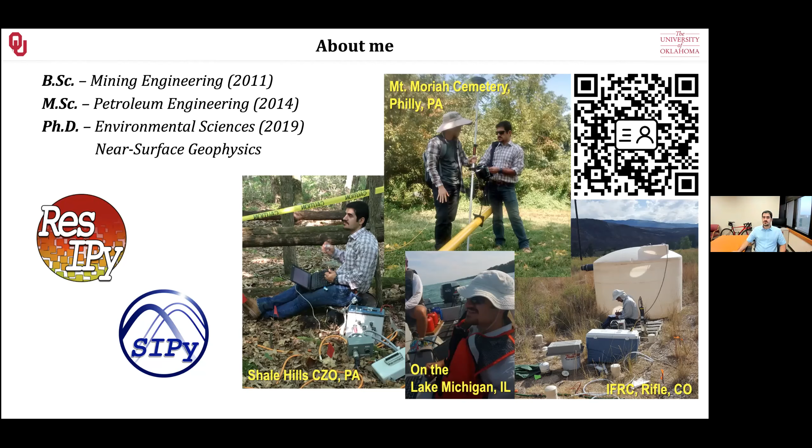In this talk, I'm going to talk in two parts. The first part would be basically my PhD project, which was soil stabilization involving an environmentally friendly method called microbial induced calcite precipitation. And then I will talk about how I approach monitoring it, unlike the regular and conventional methods that basically take a direct sample from the soil and analyze it. I use geophysics to indirectly monitor it and make sure I don't disturb anything in the subsurface.

In the second part, I will talk about how we try to use the same geophysical method to study soil failure. We know after soil has been stabilized, it can become destabilized by a lot of phenomena such as rain, buildings and infrastructure, and a lot of features. So we must know if our geophysical method is capable of doing both, monitoring soil stabilization as well as its destruction, because we want to prove that this geophysical method is a proper method for long-term monitoring of a site that has been stabilized before.

But first, let's talk about the importance of soil in our life. We all know that soil is the first point of contact to the ground, our earth that we live on, and it supports our ecosystem. All of our environmental interactions are through the soil. Our agriculture comes from the soil. Raw material mostly comes from the soil. And also our physical and cultural heritage, our history, is buried in the soil.

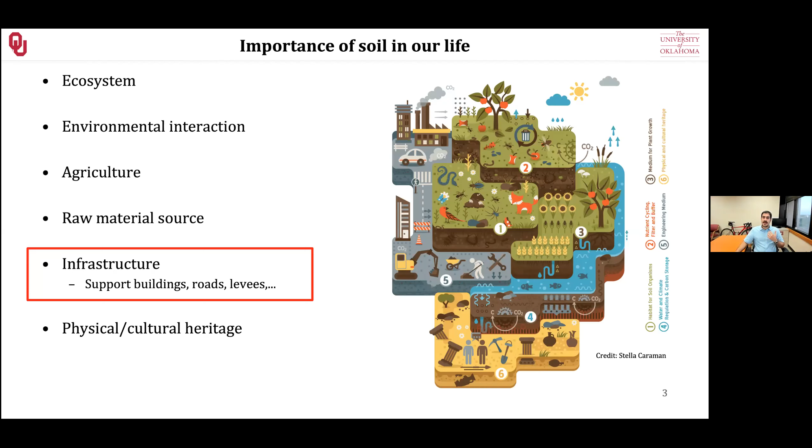But most important of all, I would say, is infrastructure. Soil is the first point of contact for us. So we have to know that the soil that we are trying to build our buildings, roads, and everything on is able to support this infrastructure. To do so, we have to do a lot of analysis to make sure that soil is capable of staying stable throughout the time. Because if it's not stable, we may have a house that collapses because of a landslide.

We may have a levee that is actually going to collapse, and a lot of bad events can occur if we don't study the soil well enough to know its mechanical properties. Rain, earthquake, weathering, and even anthropogenic activities all can make soil become unstable. And as you know, we cannot live on an unstable soil.

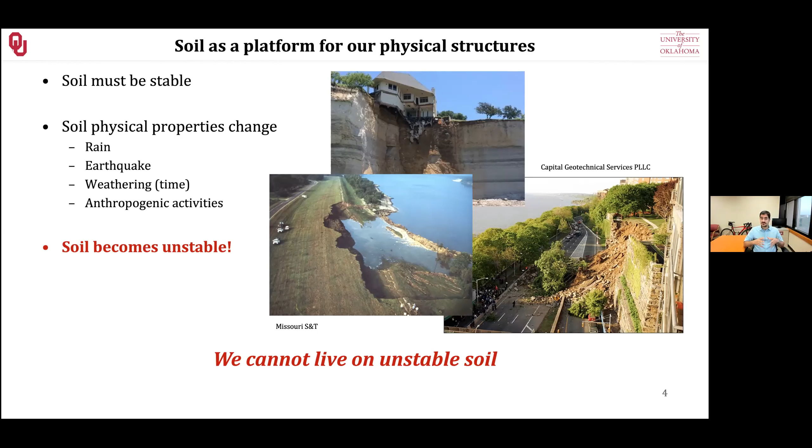So the objective here for me and for us geophysicists is to know if our methods are able to monitor the process that we use to stabilize the soil or not. And can we use the method to identify these mechanical properties of soil with geophysics, and hopefully in future, by the permanent site installation of such geophysical methods, we would be able to predict the mechanical problems that may occur in the future, basically say when or if the soil is going to fail because of any of these destabilizing events such as rain.

So let's talk about soil stabilization and geophysics. The process of soil stabilization or soil strengthening or ground improvement, as civil engineers would call it, is basically used for a lot of different factors, such as building foundations. You cannot build any buildings on a loose soil. You cannot build a house on sand. So you have to make it become stabilized.

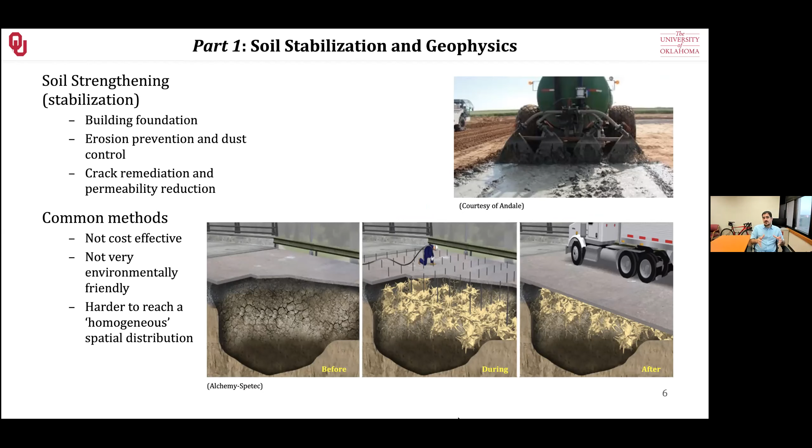Now, this is not the only thing that we use stabilization for. We have a lot of desert areas. We do stabilize the soil for preventing erosion as well as dust control. And sometimes there are rocks that are actually prone to become unstable, and we can use crack remediation and permeability reduction and so on with these soil stabilization methods as well.

Now, there are a lot of common methods currently in practice that civil engineers use, but most of them involve injecting an agent into the subsurface that binds these loose materials together and stabilizes the soil. As you can see in these pictures I'm showing here, the first method is the simplest method, pouring a cement slurry on the soil, and that basically binds everything together and that soil becomes stable.

Now, the problem with such a method is that, as you can see, it destroyed everything, all the vegetation, the environment, ecosystem, and everything. And as you probably guessed, it is not a cost-effective method because look at the instruments they're using, the material they're using, and so on. The other method that may not be as destructive on the surface would be injecting the cement through boreholes into the subsurface. Although this method might be more effective than just pouring the cement, again, this is not a cost-effective method because we have to drill a lot of small boreholes.

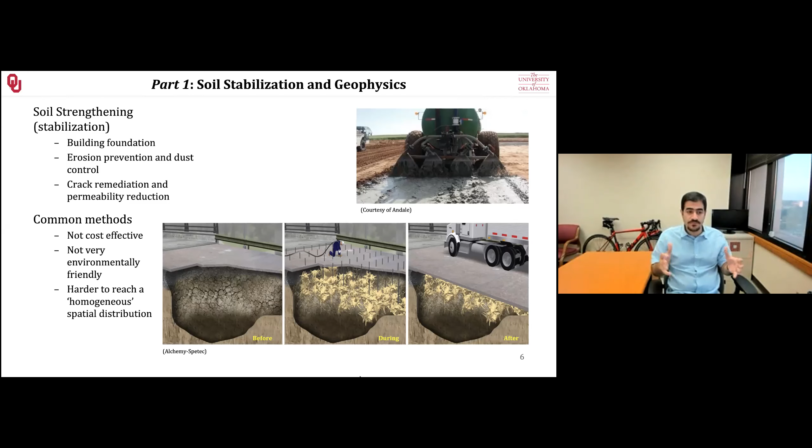Now, these problems can be overcome with a new method. This method is called microbially induced carbonate or calcite precipitation. What we're doing here is using the microbes that are already in the soil. They're available everywhere. They are not harmful to us humans, and all they need is a little bit of food, a little bit of ingredients, and they will produce this binding agent for us in the subsurface. Here, this binding agent, this cementation agent, is calcite, a mineral that we find naturally occurring as a cementation agent in a lot of sedimentary rocks.

So this method, compared to the conventional methods, is environmentally friendly. As a naturally occurring material, calcite is not harmful to the environment. It is relatively low cost. We're not injecting through too many boreholes or too much material. It is much easier to achieve a homogeneous spatial distribution because you're using the microbes as agents in the subsurface, and they're tiny. They can go to all of these small pore spaces and produce calcite there, and we don't have to do anything except feed them.

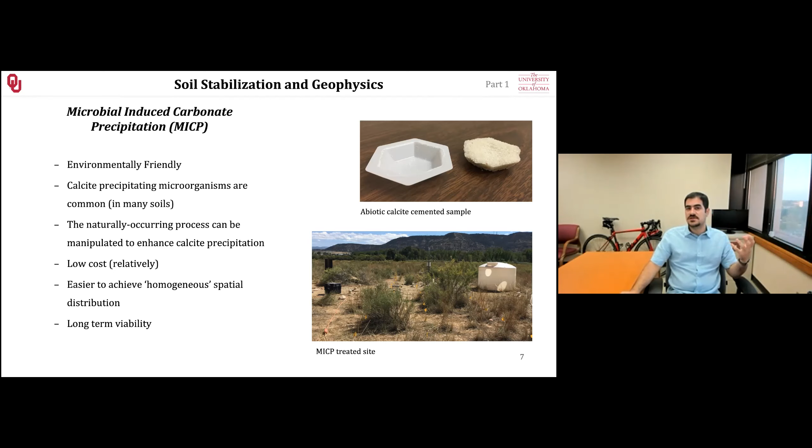So the only thing that remains is: do we know it is good for the long term or not? That's why we are using geophysics to make sure this method is viable for long-term use, like previous methods of injecting cement into the subsurface. A little bit about the monitoring techniques that we can use for monitoring this project. As you geophysicists already know, there are two ways.

Direct measurements. Basically, a lot of engineers use this method. They drill boreholes or take an actual sample from the stabilized soil in the subsurface or on the surface. These methods are accurate. You're basically taking out a sample that has been stabilized, taking it to the lab, doing a lot of analysis such as mechanical properties, triaxial test, confined stress test, and so on, and making sure that soil is working.

Now, the problem with these methods is that they are discrete. The sample that you're taking belongs to the point where you took it. It's not representing the rest of the area that was stabilized. And if you want to make sure that the whole area is stabilized, you have to take a lot of samples. And basically that defeats the purpose of stabilizing, right? You're destroying the site that you just stabilized.

And it is expensive if you want to take a lot of samples, and it's time delayed. Most of the time the sample has to go into a lab, get analyzed, and then the data comes back. So time has passed, and we don't have such luxury when we are working on a project that has a deadline.

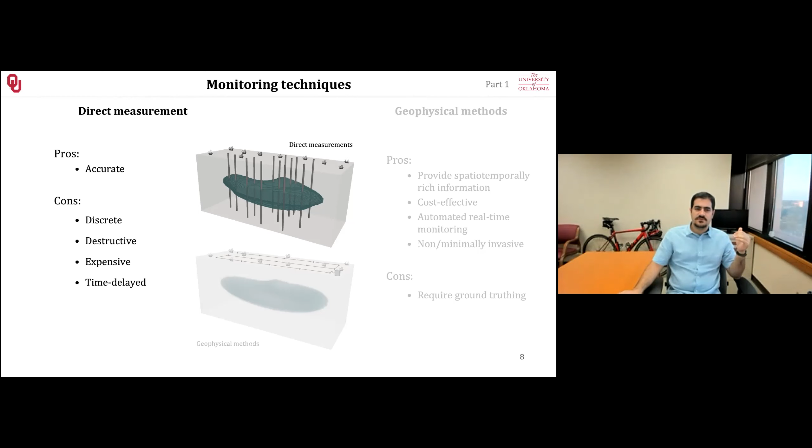On the other hand are the geophysical methods. With these methods, most of the time, we do not need to dig any boreholes. Basically, they provide spatiotemporally rich information about the subsurface with a few sensors laid on the surface of the ground, and they can be super cost effective compared to direct sampling because we're not destroying anything, and we can cover a large area in a short amount of time.

In addition, they are very beneficial for automation. We can use geophysics permanently at a site and continue collecting data forever. If we have the right tools, software that I'm going to talk about at the end of this talk, we can analyze data on the go and get information about what's happening in the subsurface during soil stabilization without any problem.

Now, there are some cons to these as well. They usually require ground truthing, so we cannot just take our instrument into the field without any prior knowledge of the site and pinpoint what exactly is going on in the subsurface chemically or physically. We can say something is going on, but we can't say exactly what that is. So we need a little bit of information, maybe a few boreholes here and there, and then we can compare that with the data that we found in the geophysical analysis.

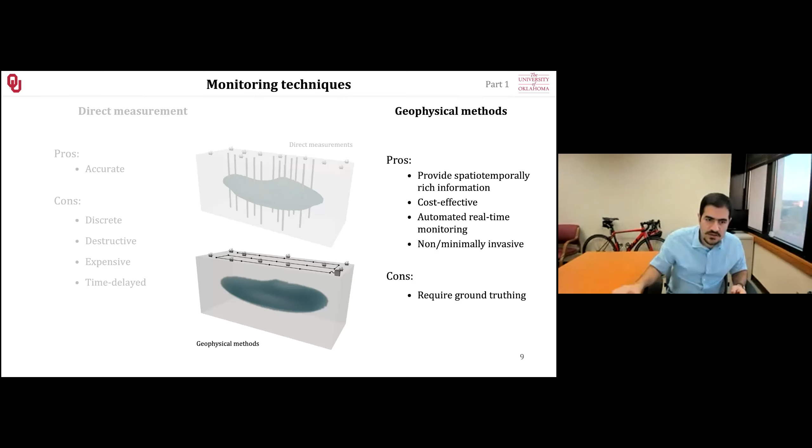Here, I used mostly geoelectrical measurements for both of these projects of soil stabilization and mechanical properties monitoring. In general, we inject a current into the subsurface through an array of electrodes, and we measure the potential differences, the time delay of these potential measurements, as well as the redistribution of ions because of the current that was injected into the subsurface.

Another thing that occurs is that because ground, or subsurface, is not a conductive material such as a copper wire, it causes the ions to be redistributed and the ground acts as a capacitor. So current passes through the subsurface, and also a capacitor acts in there. So we can measure both resistivity, or basically the ability that causes the voltage to drop, and polarization of those redistributed ions because of the diffusions that occur in the subsurface.

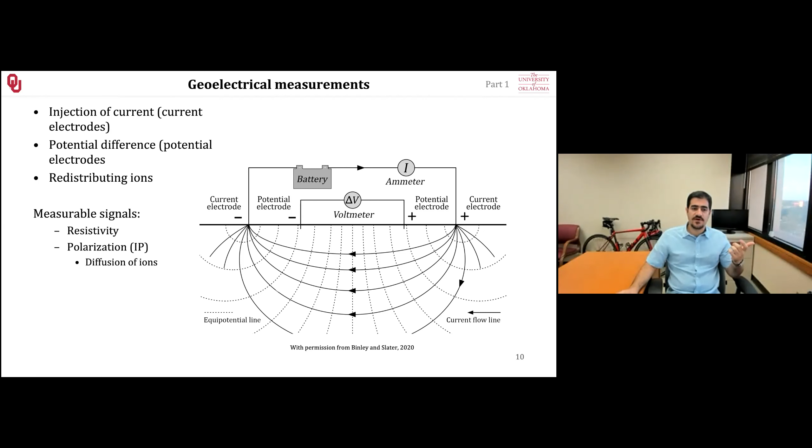Now, if we focus more on the surface of the minerals or the soil grains, we are able to see that the soil grains are not conductive, such as a wire. So basically they get polarized. They get polarized because they're negatively charged. We are passing through a current, so positive ions get attracted to the mineral, and then the free fluid acts as a connector of the current. And these two layers that we call the electrical double layer, fixed Stern layer and diffuse layer, act as that leaky capacitor, or that capacitance, basically polarization.

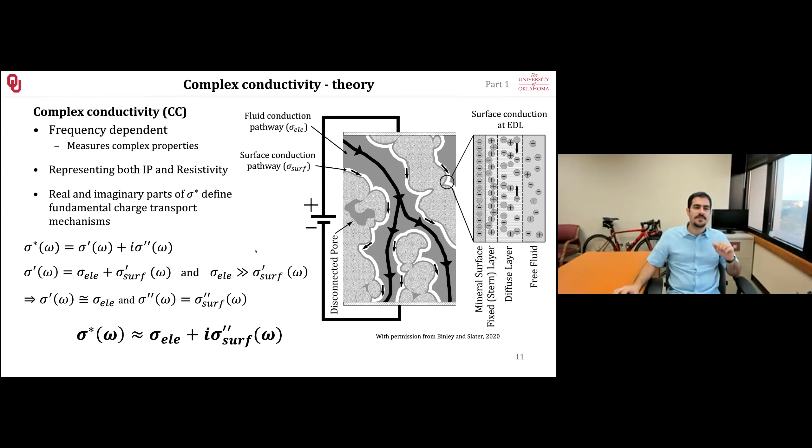Based on that, we are able to measure a lot of different features because electrical conduction through the pore-filling fluid depends on the saturation. If we have a partially saturated soil sample, we have a different conduction. If we have a dry sample, a different conduction. And if it's fully saturated, a different conduction. It depends on the porosity. The more porous it is, the more interconnected the space that we have, the better conduction, as well as depending on the fluid conductivity, if you have a very saline solution or not, and so on. So the ionic concentration is important as well.

Now, the surface conductivity, basically the polarization that was happening in here, the redistribution of ions in the double layer, depends on the surface area and not only saturation. Basically, the more grains you have and the finer they are, you have more polarization. You have more surface area to get polarized, more surface ions. And then in that surface area, if the ions are bound and they're not that mobile, you can actually measure that as well. So the ionic mobility also affects the surface conduction and the polarization as well.

There are other factors such as pore size distribution, very important. If you have a larger pore, the ions distribute slower because they need to travel a longer distance, and if they are smaller, a shorter distance. So basically the polarization occurs in a shorter time. And the interfacial charge density, basically the amount of these positive ions that are going into the electrical double layer.

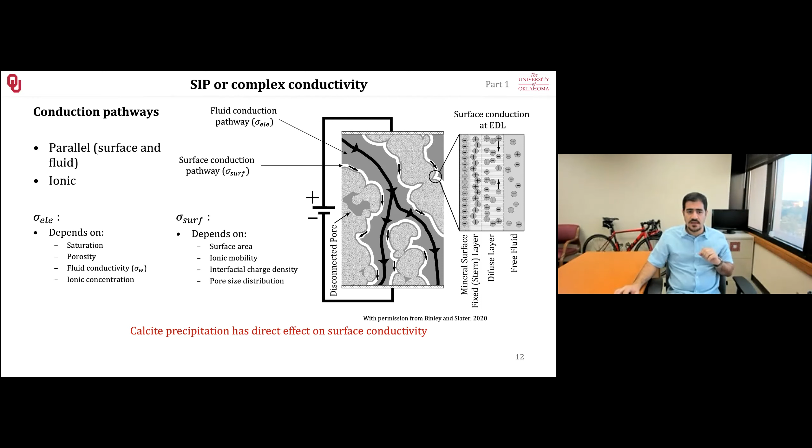And because ions take time to get redistributed, we will see something called a phase lag. This time difference gives us the phase lag. Basically, when measuring the potential, we will see everything with a time difference. We know the current that we injected, how much amperage we injected, and how much voltage that was.

So basically, we also get the impedance, or the complex conductivity measure of the resistance. Combining these two will give us complex conductivity. Now, for doing that, we need a factor called geometric factor to know exactly how we distributed our electrodes on the surface or in subsurface or on sample, or basically know the geometry of our measurement sample.

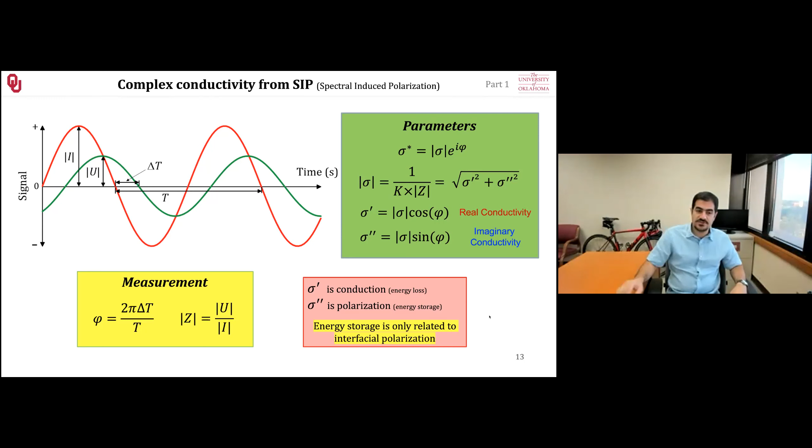And based on that, we can get the real conductivity, which is the conduction, for instance, through the pore filling fluid, and the polarization, which is the energy storage because the ions were redistributed and got polarized. We get these two in both lab settings and field setting.

For the lab measurements, we usually do everything on a column of soil. So we have an instrument capable of injecting current at multiple frequencies. We usually have a current electrode at bottom and a current electrode at top of this column that is packed with soil sample, and two potential electrodes in the middle. The geometric factor for such a column is very easy to calculate, is basically the area over length. And based on that, we can calculate the complex conductivity measures.

So what it will give you, you start measuring from lower to higher frequencies, and each of them will give you a point of phase and impedance. And when you plot everything over a frequency range of your measurements, you will get such a diagram. So ideally, you will have a peak in your phase shift or phase lag spectra, and sort of an inverse S shape in your impedance.

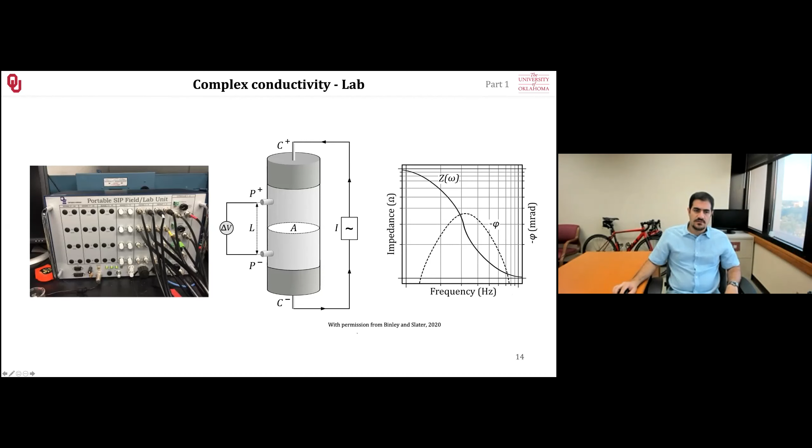So as I said, you will be measuring a phase lag, which is basically inverse tangent of the imaginary part, or the energy storage, over the real conductivity or energy loss, which because at the lower frequencies, these are very different than each other, we can just ignore the tangent, or simply put, the phase would become the imaginary conductivity over the real conductivity. And it is measured in radians, but in reality, for environmental applications, that's much smaller than radians, and we get milliradian range.

Then we have the impedance, which is the potential difference measured at these two potential electrodes, for instance, and the magnitude of the injected current will give you the impedance. Combining them with the geometric factor, which can be very complicated if you have an array of electrodes on the surface, but it's super easy for a column, which is area over length, will give you the complex conductivity magnitude.

Now, to convert this to real and imaginary part, we will use these two equations because it's a complex number. It has an imaginary part and a real part. The real part would be this equation: the square root of the squared real conductivity plus the squared imaginary conductivity, multiplied by cosine of the phase lag. And the imaginary part is the same thing, the magnitude by the sine of the phase lag. So this is the imaginary part and this is the real part.

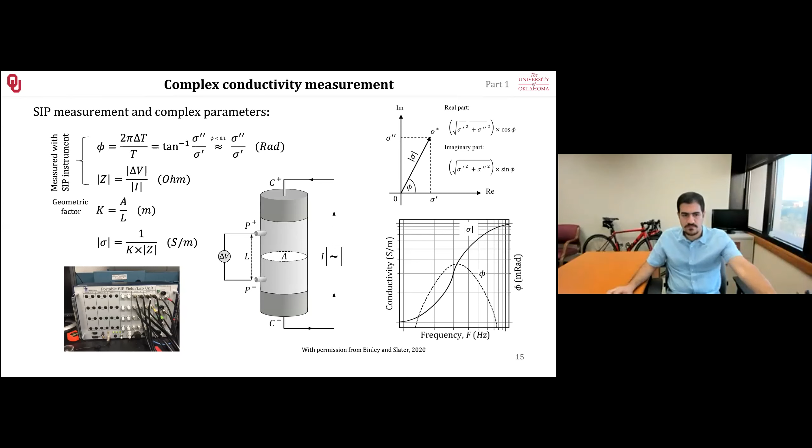And then we can use these different measures for different applications. So as you remember, the imaginary part represented the energy storage or the polarization. It depends on the surface area, on the pore size distribution, and so on. And the real conductivity depended on the saturation, porosity, and the salinity. So we get different properties from the subsurface or our sample with this complex conductivity method.

A lot of instruments are available to do so. Most of them are working based on resistivity and time domain induced polarization. And they are usually incapable of doing multi-frequency injections in the field. Those that are available to do multi-frequency injections in the field are very expensive, but scientists have shown that time domain measurements can actually be converted to frequency-dependent measurements as well, only if we get the full waveform of our injection. So we know the whole story, let's say, which I'm going to tell you about.

Now, in time domain measurements, unlike the frequency-dependent measurements where we were injecting an alternating current, we are injecting a direct current into subsurface. What we do, we basically turn on the current in a positive polarity, turn it off, and then turn it on in a negative polarity.

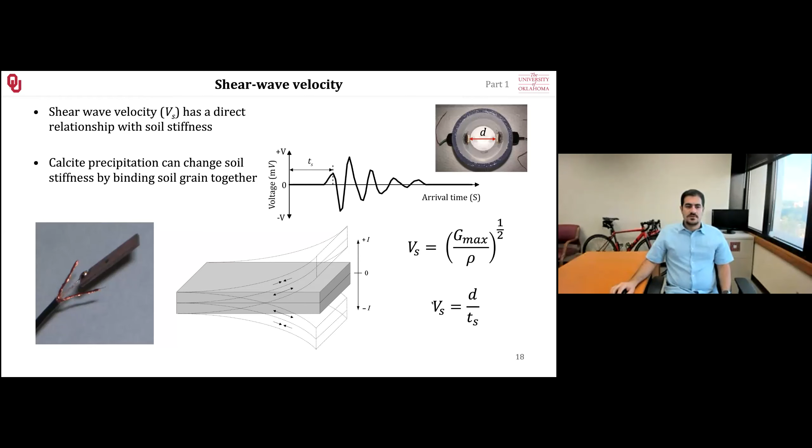Now, this would be a sort of ground truthing engineering method for my geoelectrical measurements in the field, in addition to direct sampling. But before using the microbial approach, I have to see if my geoelectrical measurements are actually sensitive to the cementation agent, the calcite, right? Do I even get any signal if I have calcite? If I don't see any geoelectrical signal when I have calcite in the soil, then what's the point?

To do so, I did a controlled environment laboratory experiment in which I only used calcite, no microbes, no nothing. So I basically injected calcite powder inside my sample and measured its geoelectrical and shear wave velocity response to see if calcite actually has any effect on our geoelectrical and geophysical signal or not.

To do so, we injected two different solutions, one calcium-rich, one carbonate-rich, and eventually calcite was precipitated inside our column. In the middle, we had electrical electrodes on the sample holder as well as bender elements, and we were able to see that calcite was actually precipitated inside the column after about 250 hours of experiment, something like that.

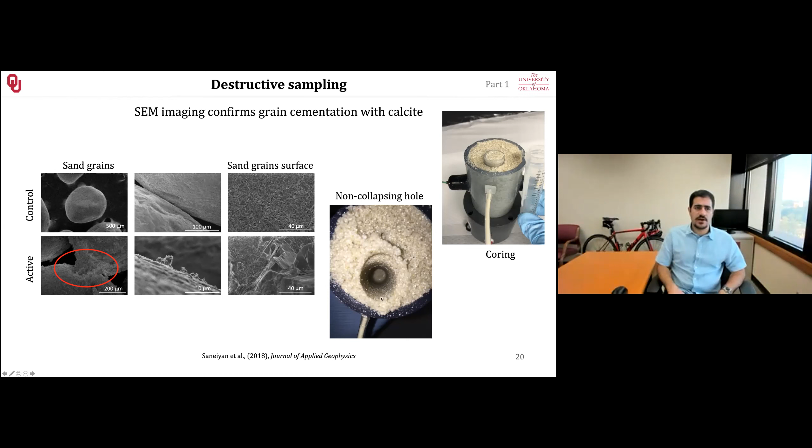And also, when we were destroying the sample, basically everything remained intact. So the mini borehole, I would say, that we dug did not collapse on its own because the soil was stabilized in there. Our ground truthing, engineering-accepted geophysical method showed that the soil stiffness had increased. We saw a 33% increase in the shear wave velocity, meaning that we have actually filled the pores with solid particles, making the shear wave propagate faster. That showed us the calcite actually cemented the grains.

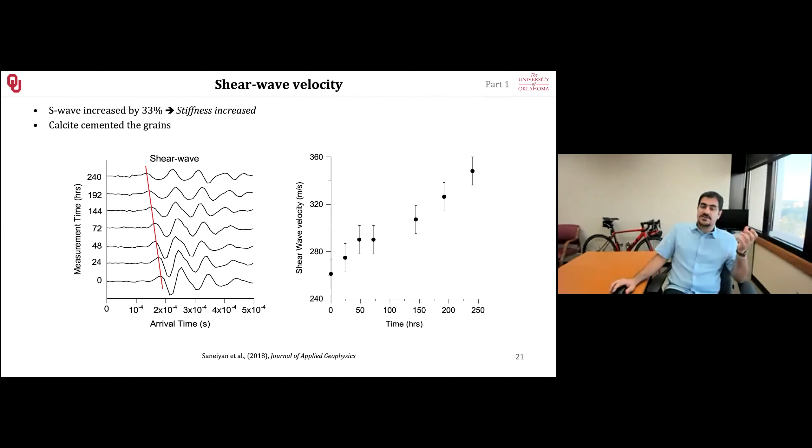But what we were interested in was the complex conductivity method, or the geoelectrical response. In that, we were able to see a peak forming in our imaginary conductivity spectra. You remember the phases I showed you, that we were looking for a peak, right? We didn't have any peaks initially, but as the precipitation continued, we were able to see a peak forming at around 1 hertz that keeps going up in magnitude until the middle of the experiment, and then basically starts to go down and reaches a constant level.

Now, if you remember, I said that the imaginary part, the polarization part, the energy storage part, depends on the surface area and the size of the pores and such factors. That basically tells you the more solid particles in a finer form you have, the higher polarization you get. Now, I interpret that initially the signal is going up because the calcite is precipitating in a powder form. And as we keep precipitating, these powders are coagulating, and that initial increased surface area from the powder form is actually decreasing. They are connecting together and becoming larger calcite crystals, calcite coagulations.

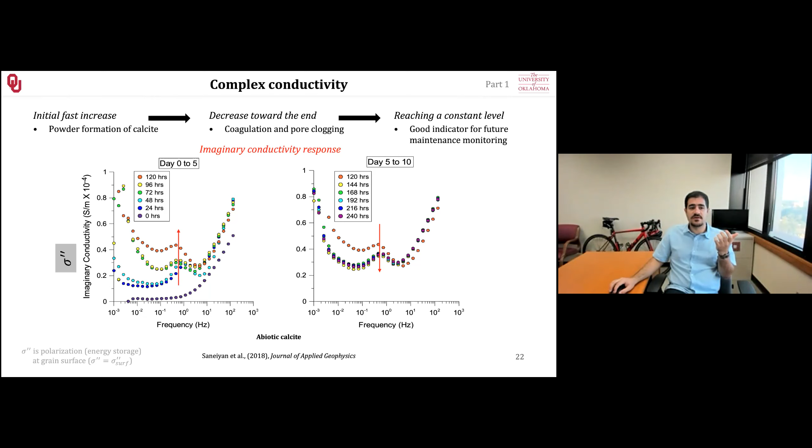So basically the surface area is now reducing from that peak after a few days and reaches a kind of constant level, showing us that the calcite is no longer increasing in surface area inside the pore spaces. What's happening is probably either an equilibrium, where the same amount is getting precipitated as is getting flushed out or dissolved in the water, or the area in the middle that we were measuring is now fully saturated with precipitated calcite, and we are not sensitive to any area outside of these potential electrodes. So if the calcite is precipitating there, we don't know it, honestly.

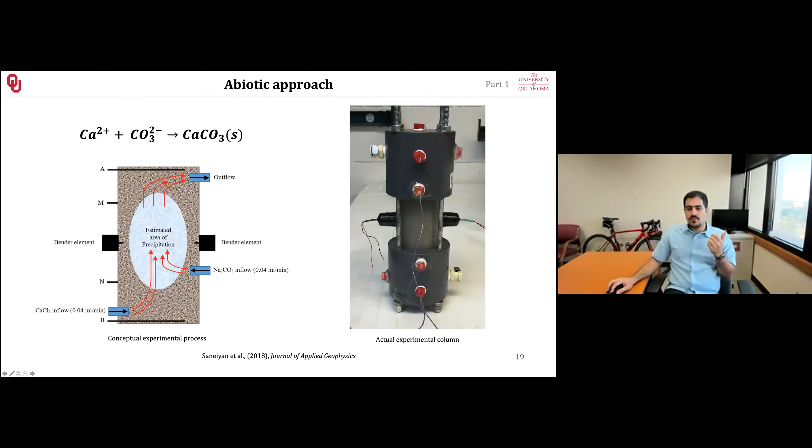So to put it in context, we had two different methods showing that our man-made calcite precipitation soil stabilization method is effective, and also that we can measure its geophysical signature.

Either being the shear wave velocity, which showed an increasing trend over time, not going down, and the complex conductivity that showed the pattern of the precipitation as well. Not just showing that, okay, we have a stabilized soil, but it also showed us when it's the time to stop injecting calcite. We don't need any more material.

This is very beneficial for field applications that makes us say, okay, enough. We don't need more. We don't need to pay more money to inject more material, because now we reach the constant level of a stabilized soil. We're no longer stabilizing our environment. We're just basically flushing the stuff out.

Initially, as I said, we assumed that we have a powder precipitation increase in the complex conductivity magnitude signal, and then these coagulated and created layers of calcite on top of each other, so that initial surface area that was because of the powder is reduced now. And then we reach a constant level because of this equilibrium going on.

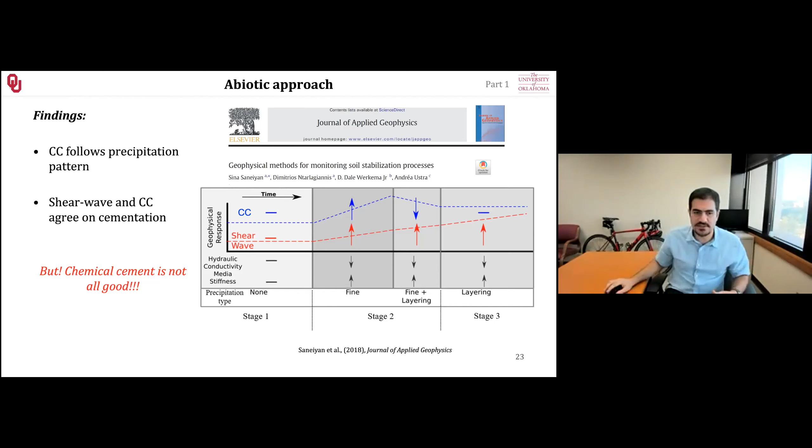But one might say, okay, this is perfect. Why don't we just use this abiotic injection of two chemicals in the subsurface and say, oh, we're good. Calcite is environmentally friendly, unlike Portland cement, for instance, and it works fine. Your geophysical signals work fine, but why do you need this?

So to those people, I would say, all right, remember, if there isn't any agent in the subsurface to take this cementation agent with it and precipitate it in the smallest pores, then we're gonna get a poor distribution of cementation. Basically, whatever is happening is at the zone where we are mixing these two chemicals, the zone we inject, not everywhere else. So how do we overcome that? To overcome this problem, we're gonna use microbes.

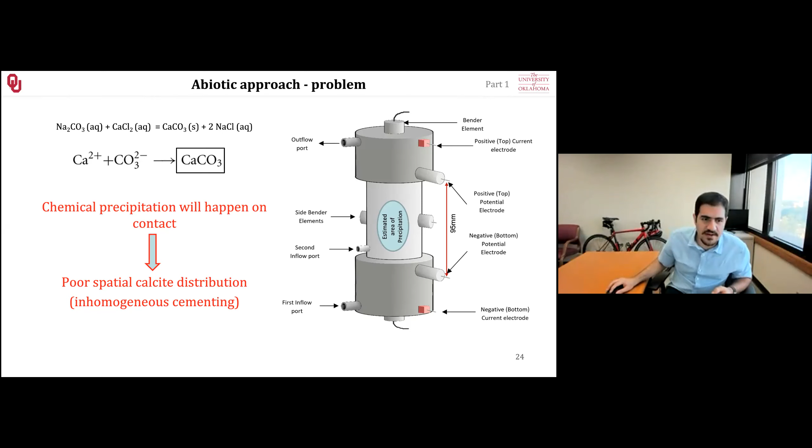Specifically, for the lab experiment, we are using a type of microbe called Sporosarcina pasteurii. These microbes are known to produce large calcite crystals, and they're very active in decomposing the material to produce calcite compared to the other communities in the subsurface. But we are just using these because this is a lab measurement. In the field, we don't really need this type of microbe. All other types of microbes capable of precipitating calcite are going to work, which I'm going to talk about.

In the lab environment, what I did was basically grow these microbes on a petri dish. I forgot the name for it. I'm not a microbiologist, but this growth media on the petri dish, for instance, here that you can see, prevents the microbes from moving. So when you try to grow them, they do not go outside of the area where you put the microbes. So basically, we prevent them from moving so they don't become contaminated by other microbes. Or if there is any contamination, we can actually see that.

So the very first step for a microbial project is to grow the microbes in isolated colonies to make sure you haven't done anything wrong. And then when we are sure that our communities are perfect and without any contamination, it's time to move them from the solid state into liquids, because we want them to actually move in the subsurface or in our sample. We don't want them to be at a fixed position, right?

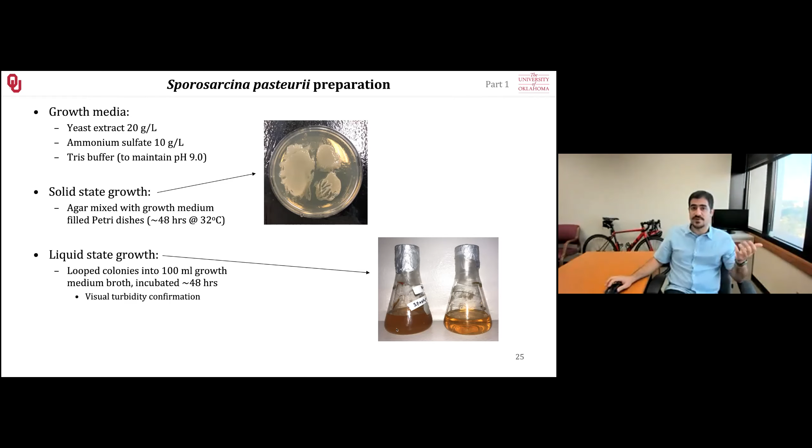So what are the right ingredients? These microbes need urea because they are capable of decomposing urea as a source of food for themselves. And when they do that, they produce carbonate. Now, if we have a rich environment that has calcium in it, it basically immediately starts precipitating calcite. So we're good here.

But there is a benefit to these microbes as well. They tend to attach to these calcium ions. The calciums actually get attached to the body of these microbes. So as they move around inside the column to find food, to basically go around and eat because they're hungry, they take these calcium ions with them, and wherever they go, they decompose urea, they produce carbonate, and at the same time, calcite gets precipitated.

So we have a better distribution of the cementation inside our sample or under the ground using these moving microbes. We call them motile microbes. So compared to the previous method, we're using the same injection ports like the previous time, but we are getting a better distribution of cementation inside our column. Or at least that's what we're hoping for theoretically. Let's see if we have reached that point or not.

In this part of the experiment, again, we use shear wave velocity as a ground truthing method. And we were able to show that the shear wave velocity increased about 34%, slightly more, but in the same ballpark as the previous experiment. Again, we are just using calcite inside our column, and the bender elements are at the same location and so on. But clearly it shows us the calcite cemented the grains together. So microbial induced calcite precipitation works as a soil stabilization method.

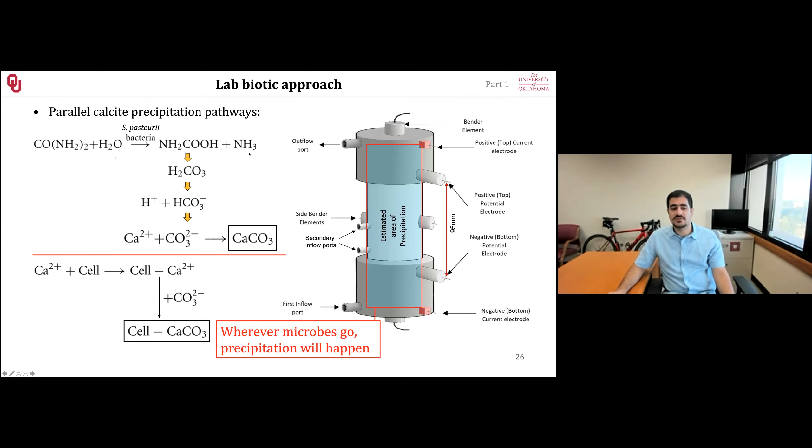And also analyzing the effluent solutions at each step of the way, we were able to see that the concentration of ammonia is increasing. If I go back here, you see ammonia is a byproduct of decomposing urea. So when it is there, it means that the microbes did their job. They basically consumed the urea, produced carbonate, and released ammonia. So that's one of the good indicators that the microbes did their job.

And ammonia is very stinky, it smells very bad, and we didn't need to analyze it, honestly. We just had to smell the column. It smells very bad. Anyway, so an increase in the amount of ammonia was observed. Calculating the chemistry, we were able to know the amount of calcite that was precipitated inside the treatment area as well.

But we are looking for our complex conductivity, or geoelectrical signal, right? We were able to see a similar trend here, just like the previous experiment, that we had sort of a no-peak sort of thing in the imaginary conductivity signal. And as we started treatment, the peak increased in magnitude and reached a maximum level, and then went down and reached a plateau.

Very interesting, very similar to the previous experiment, but this time we reached a much higher magnitude compared to the previous step. So we had much more surface area produced by these microbes. Basically, they distributed everything much better than the previous experiment. And then we had the same trend compared to the previous one.

So basically increasing, reaching a peak, decreasing, meaning that the calcite crystals first formed as a powder and were scattered all over. And then as we kept injecting food and calcium for these microbes, they produced larger calcite crystals that coagulated together and layered together. And basically that initial big surface area, because of the powder form, was reduced into chunks of calcite. So the signal magnitude was decreased.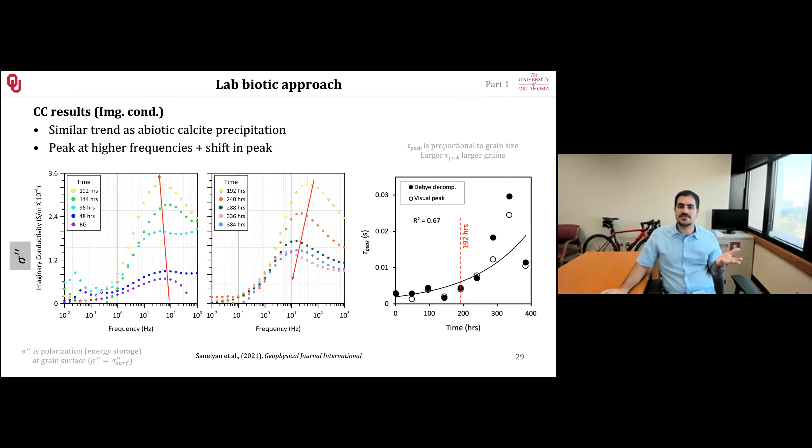Taking out the real conductivity just to show you that the imaginary part is sensitive to the pore size distribution, surface area, grain size, and so on. The real conductivity is only a measure of solution conductivity and porosity and so on. We can clearly see that there are no such peaks to tell us about the grain sizes or pore sizes in the electrical conduction that is happening through the pore filling fluids at all.

So we certainly need to use the complex conductivity methods or the induced polarization technique if we are trying to monitor soil stabilization in the field in the future.

So to summarize what happened here, basically we had a soil devoid of any calcite, and the moment the microbes were introduced with urea and calcium-rich solution, they produced a fine precipitation around the pores and inside the pores, and it reached a moment that we had a lot of fine precipitates inside the pores, and as time went by, they coagulated together and clogged the pores. So we don't have that initial increased surface area anymore.

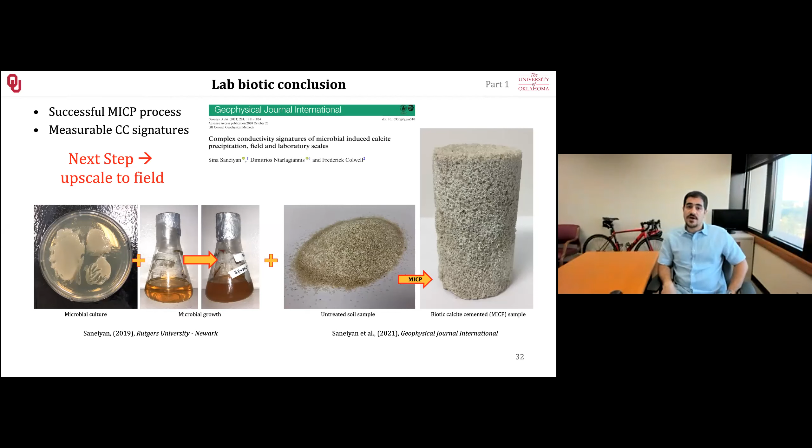To do that, we went to a field site in the city of Rifle in Colorado, United States. It was a Department of Energy site that previously had shown that microbes capable of decomposing urea exist in the groundwater. So all we had to do is feed them with calcium and start producing calcite in the subsurface. And that made it the perfect site for us.

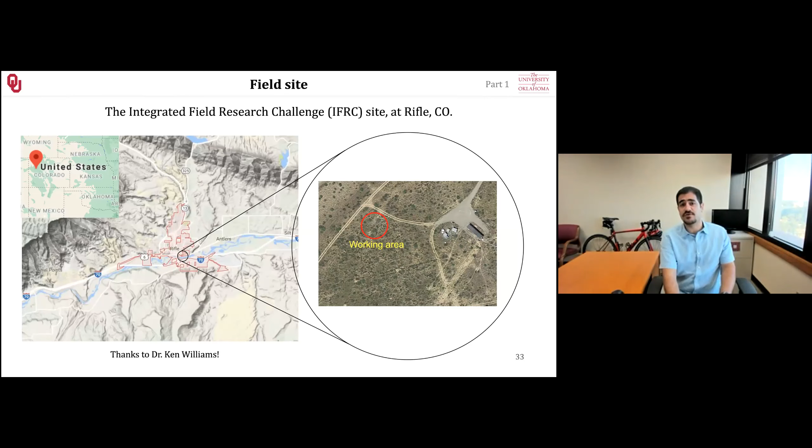Additionally, that site had numerous well bores already in place for ground truthing. So all we needed was to take samples from these boreholes, either solution samples or actual samples. So this is a perfect site for us, and it was large enough. It was about 20 meters this side and about 10 meters this side. So I would say large enough compared to a column experiment in the lab.

We know the groundwater direction here. The groundwater direction is basically from this side to this side. So we started injecting through wells available around here, and groundwater took all the ingredients with itself, and then we withdrew from the down gradient wells here to make sure that we are not contaminating the subsurface with too much ammonia. So we injected here, we collected here, and we assumed everything is happening in the middle here, just like what we had in our columns.

For that purpose, we laid out our electrical resistivity and induced polarization array on the surface on 3 lines here, and we were able to collect data on a daily basis.

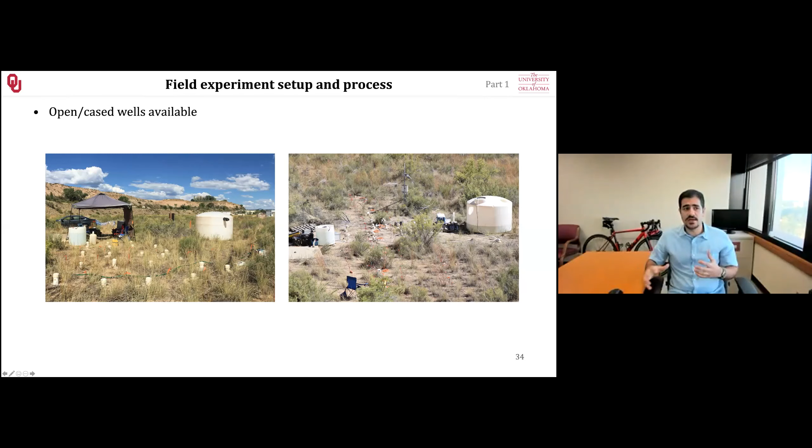What we did first, we had to make the microbes proliferate. We wanted as many microbes as possible in that region for us to produce calcite. So we gave them a source of carbon food that was not urea, just to grow. This was basically sugar, molasses. We waited 24 hours for them to proliferate and then started injecting urea on a daily basis.

Initially, we injected with a small concentration. That was not as effective. And then after 8 days, we decided to increase the concentration of urea. So we increased the calcite precipitation much more because we didn't have enough time to stay in that field. We only had 20 days.

At the same time, we were measuring resistivity, time domain IP, and spectral IP, which will give us complex conductivity. So we had every geoelectrical method over there. Additionally, we had the shear wave velocity measurements in the boreholes that were provided to us, so we had the ground truthing ability with the shear wave velocity. And we also collected the effluent to analyze a lot of different things such as ammonia, pH, conductivity, and so on.

So if I want to schematically show what we did, this was the smaller tank here at top and the larger tank at the bottom, and the groundwater is going to the south direction. We injected everything through 3 boreholes from here, and we withdrew everything from 2 down gradient wells and assumed everything is occurring in between these green and red boreholes.

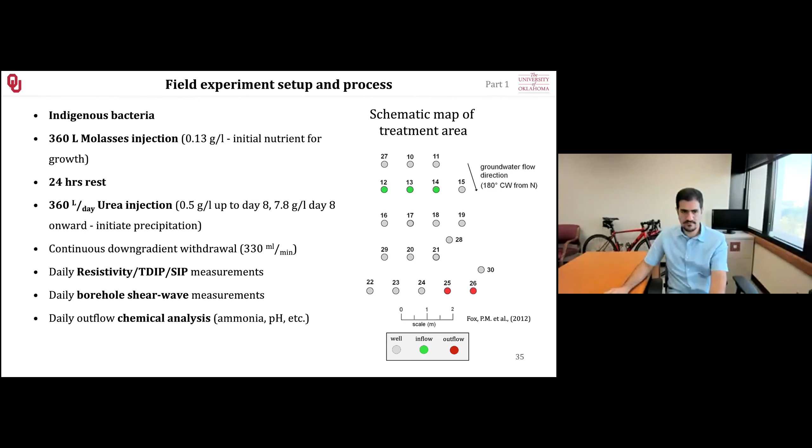We used a SIP 256C instrument from Radic Research Germany for measuring complex conductivity. We used an IRIS Syscal Pro capable of doing resistivity and time domain measurements at around 4 Hertz for our time domain and resistivity measurements. And we did everything on 3 lines for the time domain measurements and 2 lines for the SIP measurements.

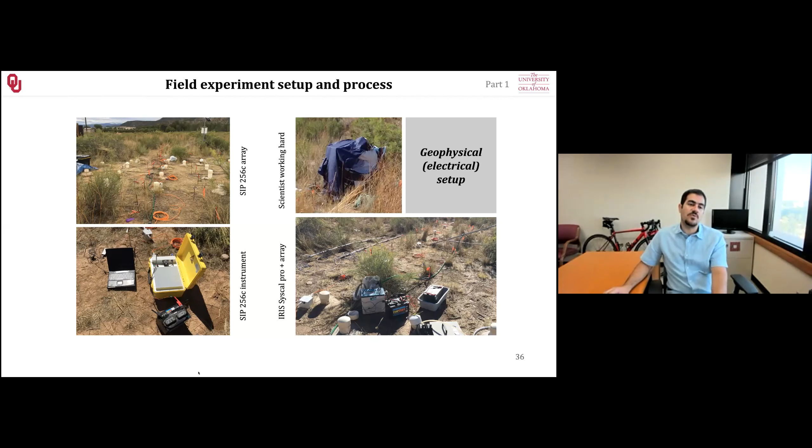Now, why we used only 2 lines for the SIP is because lower frequency measurements take forever. If you go to frequencies below 0.1, it can take up to 40 minutes and up for just a single frequency measurement. So we don't have that luxury in the field, right? We went all the way to 0.156, and the whole measurement from 0.156 to 500 hertz took us about 4 hours.

And during that time, you have to do nothing. You just have to let the instrument take measurements. So 4 hours for one line, another 4 hours for two lines, that's already 8 hours. And then we had to do resistivity and time domain measurements, which took about 40 minutes each as well. So just imagine that we couldn't do more than that.

Anyway, we had our SIP measurements at two lines, close to injection and in the middle, and we assumed by then everything was precipitated, so we didn't use a third line here at all. But because time domain measurements of IP and resistivity are faster, we did three: one close to the injection port, one in the middle, and one at the withdrawal port, to make sure we map everything. We have a 3D grid to map everything that is occurring in the subsurface here.

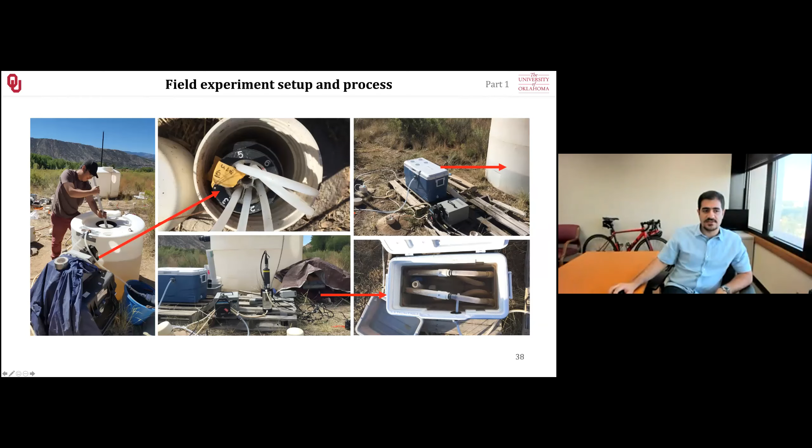At the end of this 21-day sort of thing, 16-day experiments that we had done, the first week was not really good. We were able to see that the calcite was precipitated in our samples. What we did, we basically made soil columns and put them down in this wellbore in the middle. So we had this wellbore in here. So we put that soil sample down there kind of as our core.

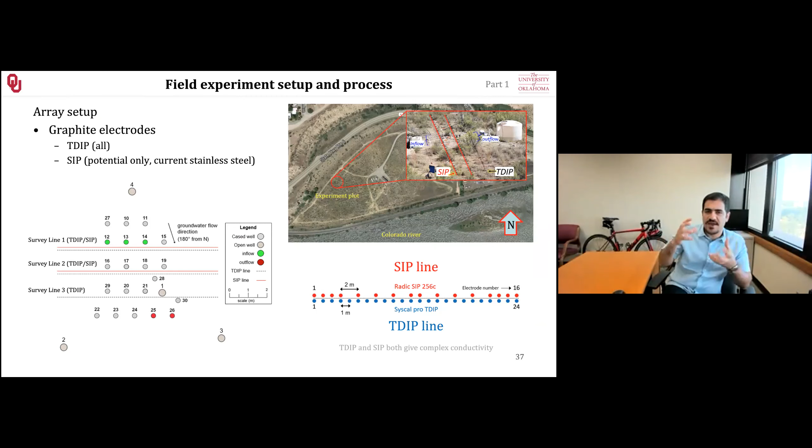Instead of taking out a core, which we couldn't do there because it was super expensive, we made a core and put it down. And it didn't have any calcite in it. It was basically sand. And after the treatment, we are seeing evidence of calcite in there. So our microbes were able to produce calcite. Additionally, geochemical analysis on concentration of ammonia showed an increasing trend over time, meaning that the microbes actually decomposed the urea as well.

We were lucky to do a nuclear magnetic resonance measurement as well. I'm not going to talk about it that much, but it's a geophysical measurement that is sensitive to hydrogen atoms. So the more water you have, or hydrocarbon, for instance, the more hydrogen atoms you have, the higher the signal. Now, we are doing our treatment in a saturated groundwater environment. So we have all the water we need. If we precipitate calcite in there, we are pushing out the water and replacing it with a solid material that doesn't have hydrogen in it.

So what we are expecting is after this treatment, we are reducing the number of hydrogen atoms, thus reducing the NMR or nuclear magnetic resonance signal. And that was exactly what we saw. After 7 days, we were able to see that the signal in the well in the middle of the treatment area, right between this red and green, has almost 1 order of magnitude less hydraulic conductivity measured from NMR compared to these wells outside of the treatment area. That means that a lot of water has been pushed out and replaced by solid particles of calcite. This is great. This is showing us, okay, something is happening.

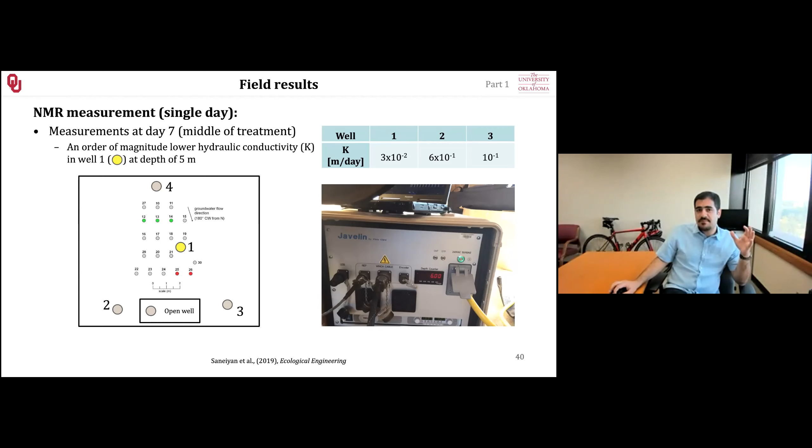Additionally, our shear wave velocity increased by 40% during this experiment in all directions. So this is our treatment area. We had our source in the middle and then receivers in all of these 3 boreholes, and in all of them we are seeing about 40% increase in shear wave velocity. So similar to the lab, that means something solid has happened and been acting as a cementation agent inside there.

But unlike these, I would say, one-dimensional data analyses that we did, the geoelectrical data are not easy to work with. Initially, I spent a lot of time to clear up the noise. Induced polarization data usually have a lot of noise, and it's not an easy thing to work with. To do so, my colleagues and I developed a software called ResIPy that is capable of doing a lot of data cleaning for you, and I recommend if you're using geoelectrical methods in your field, use that software.

I learned this, I would say, the hard way, how to deal with my data, because initially I wasn't seeing any signal. So what I did was I collected data, did some initial filtering where stuff that made no sense was completely removed, did error analysis and applied that error to my data, and then finally filtered the data after the error analysis and did inversion. I'm not going to go over how inversion works, but basically it compares your data to a model, tries to find the lowest misfit, and gives you a resemblance of what's happening in the subsurface. To do that, I use the software that we developed, ResIPy.

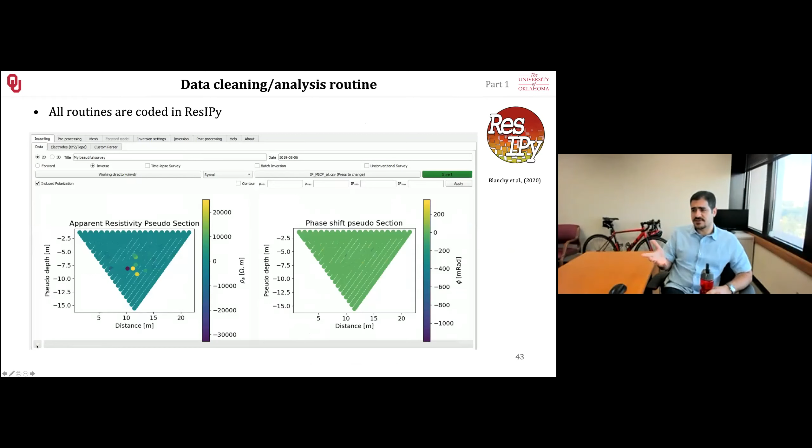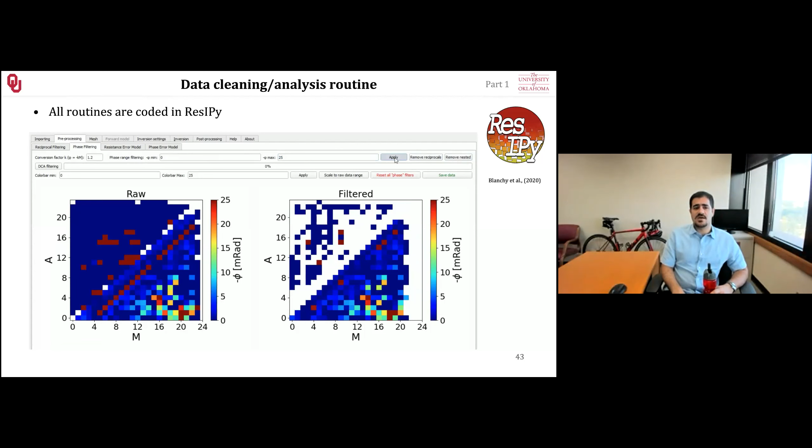So in here, I'm just going to show you how it worked. Basically, what filters are available. If you have reciprocal data sets, for instance, you can clear your data from obvious errors. If you have induced polarization, you can filter them based on range, or if you have nested measurements, meaning the potentials in between currents, you can remove those as well. There are a lot of different types of filtering available in the software that I urge you to use if you ever measure any induced polarization signal, and different error modeling as well.

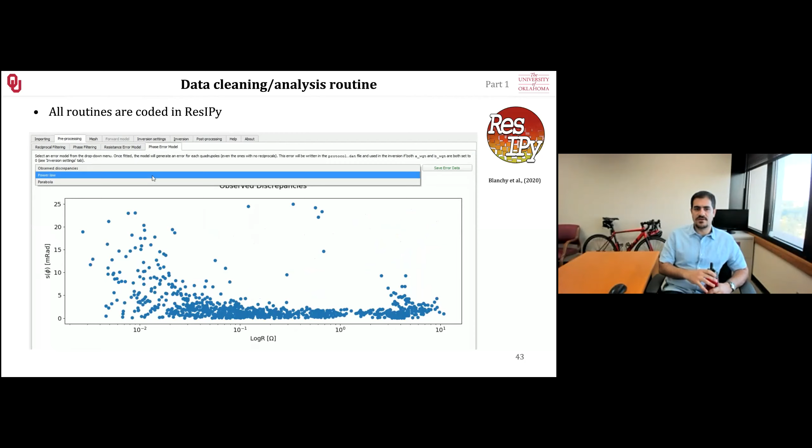And this software is freely available to download. The source code is also available. So if you want to do some coding, you can also do that. All right.

Now, what we did here, we had 3 lines that we measured on electrical resistivity and time domain IP, and 2 lines for spectral IP. We measured the chargeability, that we were able to convert into phase shift and then take out imaginary conductivity out of that for a time domain signal, because we knew the frequency that the instrument, the IRIS instrument, was working, and we easily could compare it to the SIP measurements.

We did all this hassle of time domain measurement to show: can we use time domain IP instead of SIP? This takes 40 minutes maximum. This one takes 4 hours at least. So if you're an engineer, you don't have four hours to do your measurement. If this one works fine for you, you're going to take this.

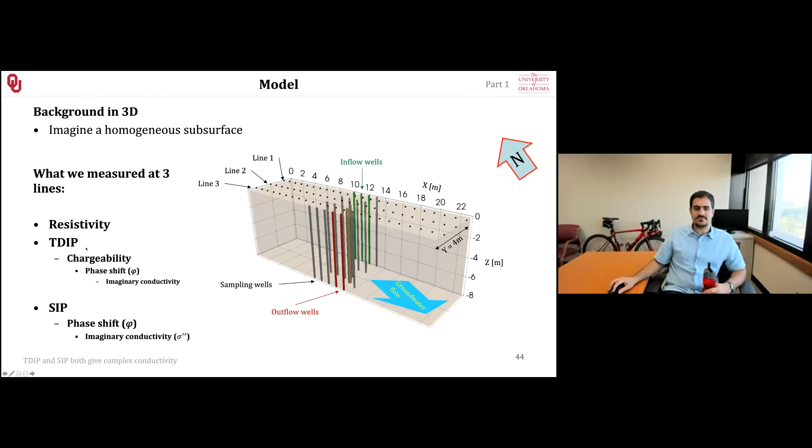Resistivity clearly showed the subsurface structure. Obviously, as we all know, we were able to see everything with resistivity, but it wasn't the right signal for calcite precipitation. I'll show you in the next slide. We were able to see the clay layer that was put in that site as a part of site remediation in the 1990s. We were seeing the groundwater region in the porous material with a higher resistivity because that was fresh water. So electrical resistivity was really good for mapping the structure.

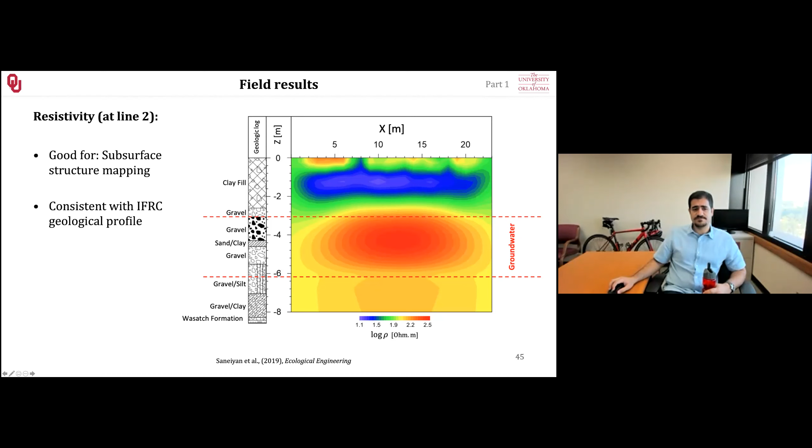And the resistivity failed to show calcite precipitation, because if you remember, it's mostly sensitive to the pore fluid conduction, right? And we didn't change that at all because we used groundwater, mixed it with a little bit of urea, which doesn't chemically change the conductivity that much, and injected it back into the groundwater. So as you can see, if I use a time-lapse image, basically showing the changes over time, the resistivity is not showing that much change over time.

So calcite precipitation is not as effective to increase the resistivity as we expected. We are not injecting so much calcite that it pushes out all the water possible. We are injecting a little bit. But imaginary conductivity, on the other hand, was able to show more than 500% change over time. So very sensitive to the precipitation of this fine powdered calcite inside our soil. So this is technically the right method to go with. You need to measure induced polarization to be able to get the imaginary conductivity to measure if your MICP is working. Resistivity alone won't work.

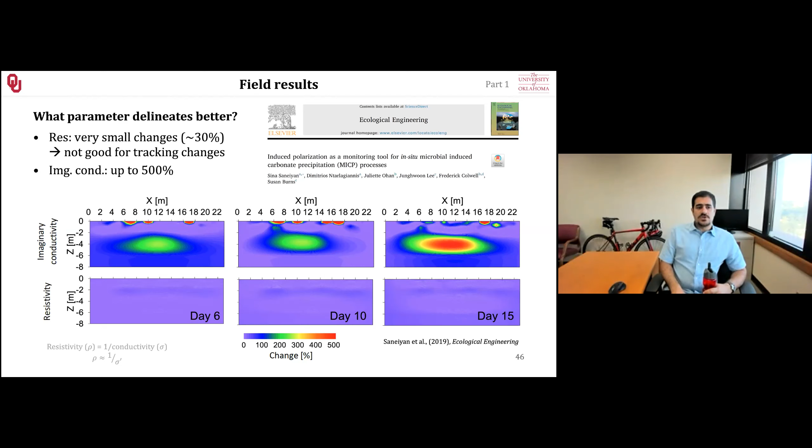So we are in the field. We don't have time to do all those calculations of imaginary conductivity, but we are measuring the phase shift and the impedance. So let's see if the phase shift alone, without conversions to calculate the imaginary conductivity, works or not. We already knew that the imaginary conductivity works from the previous slide. But let's see if the phase works as well, or let's say the field measurements of our complex conductivity.

Clearly, as you can see, over time, the line that was closer to the injection port is showing evidence of signal increase, matching the treatment area that we had. So the phase has actually increased over time, all the way to around 6 milliradians. And bear in mind, we use phase as a negative value because it takes time to measure it. Right? It's like a negative value compared to the actual time. It's a delay, so it's negative.

For the second line, the same thing happens. The start was a bit delayed, I would say. And then, as you can see again, by the end of the experiment, we are clearly seeing the changes in the treatment area. And the third line, we didn't have a background measurement for that because we didn't have a third line initially. Again, time consuming, right? But then we decided to add it.

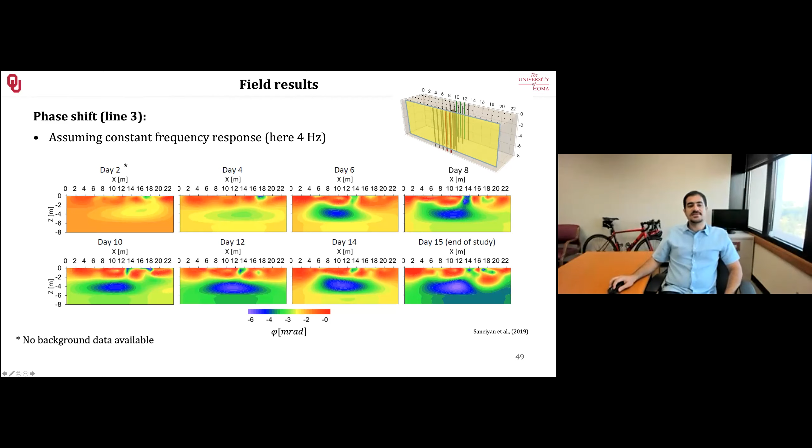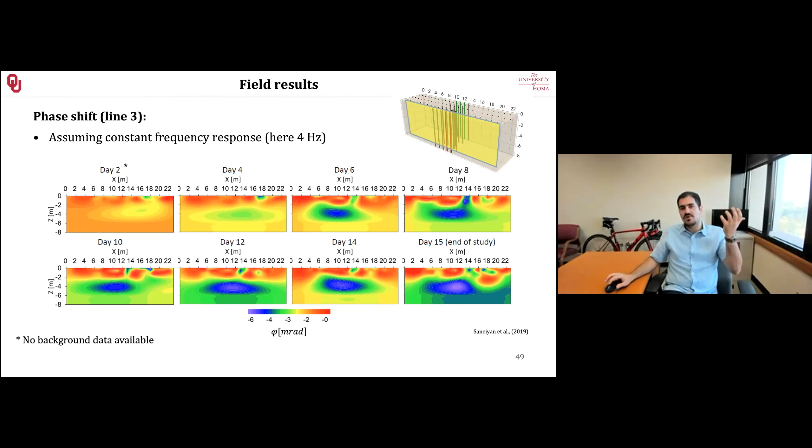So as you can see, we are seeing the same kind of effect, but maybe smaller compared to the two, at least in the area. So I would say most of the precipitation occurred closer to injection in the middle, and then there was nothing left for the last part, nothing but a smaller amount. If we show that in three dimensions and exclude all the surroundings, you can clearly see the calcite precipitation occurring exactly where we want it to happen.

And our geophysical phase shift measurement is basically similar to the imaginary conductivity, assuming that the real conductivity, which is due to the water conductivity, hasn't changed and remains constant. We are clearly mapping the subsurface affected by MICP. And as you can clearly see here, in the direction of the groundwater, we are seeing more precipitation. So our geophysical technique is much more effective to map the subsurface affected by MICP than direct sampling, such as shear wave velocity, I would say, and a lot of other methods.

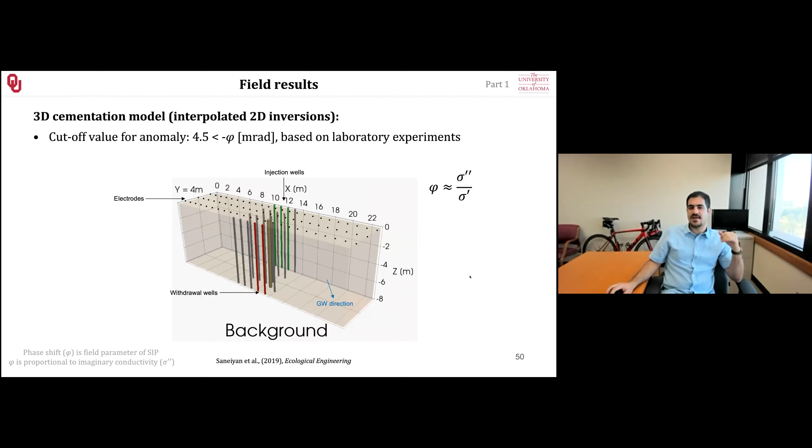All you need in future is just a small amount of measurement showing that the MICP actually worked. That could be like an effluent sample or something, and the rest is by geophysics. You can install these electrodes permanently on the site, do your measurement, and basically enjoy. Our SIP measurements were similar to time domain. The real part of the spectral IP did not show any changes over time, only showed the structure of the subsurface as expected, because we didn't change any conductivity.

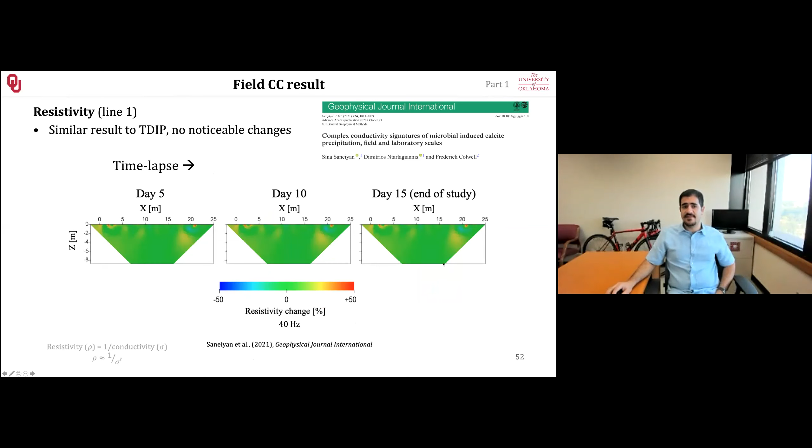So over time, we're not seeing anything. But if you use the phase shift and basically do a time-lapse analysis, we are clearly seeing at the same area the increase in the signal is observed at higher frequency as well as lower frequency. So we are seeing a difference in here. The peak of the signal at higher frequency is different than the lower frequency. That could be because of a lot of different things.

Microbes can affect at different times, right? And at different times that can be measured at different frequencies and so on. So we are still investigating why this has happened. These are not exactly the same, but that can be because of a lot of different factors in the subsurface. Nonetheless, at both of these different frequencies, we are clearly able to see the changes in the subsurface with

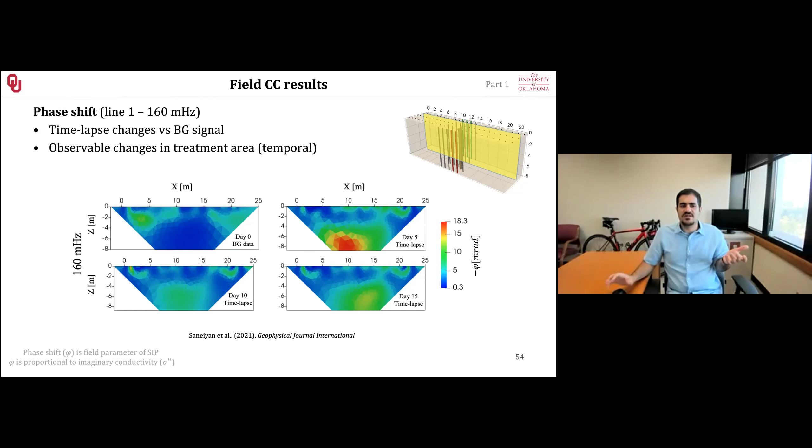the spectral IP. But one would say, okay, this took you 4 hours for each measurement, so it's not as beneficial. Your time domain IP clearly was enough because you were able to see the changes in subsurface with that too. So if I'm an engineer, I would go with time domain for my field measurements.

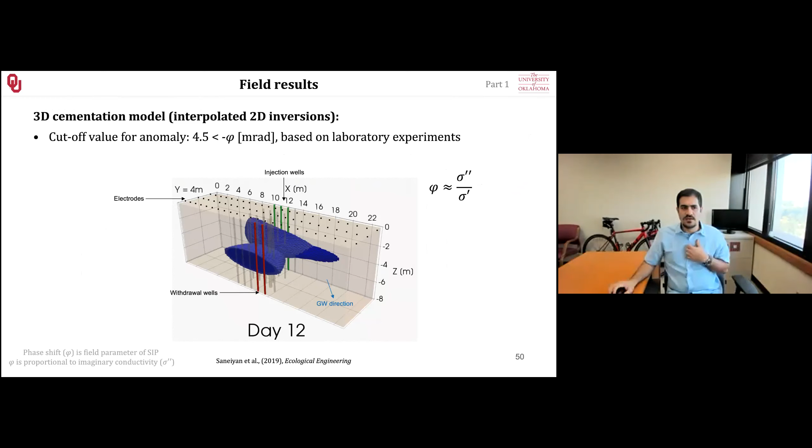So in conclusion, MICP improved the soil stiffness. So it's the method to go if you want to improve soil stiffness with an environmentally friendly approach. The phase anomaly response to MICP precipitation clearly showed the direction of the groundwater and the precipitation area. All of the geophysical methods are sensitive to the changes during MICP, but time domain IP and SIP are spatially and temporally more sensitive compared to the other methods.

And SIP is sensitive to calcite precipitation pattern, because we saw that we can detect the fine precipitation compared to coagulated precipitation. But because it's so time consuming, probably an engineer only prefers to go with the time domain in the field.

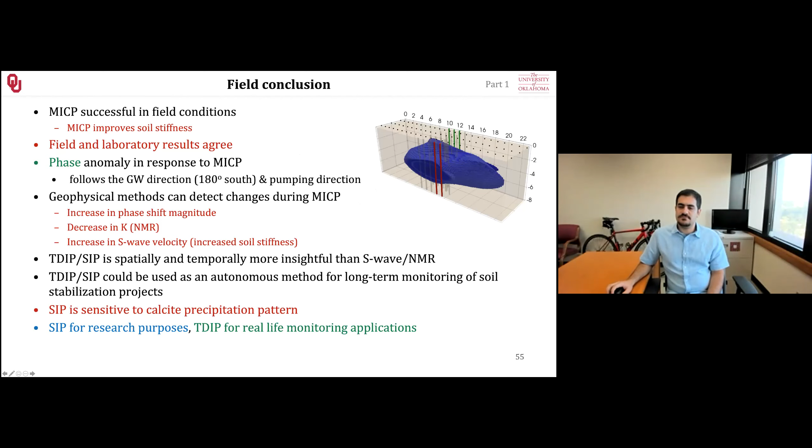Now, I can also talk about the deformation, the second part, but I'm not sure if I have time. So if you want, I can do that, but if you don't want, I'm gonna stop here. Do we have time? Yes, you can continue. Okay. All right.

This is more interesting, honestly, to me, because a lot of engineers actually use a lot of... there is no indirect method to measure the deformation and so on. So let's talk about this. What is soil deformation? Basically, if you apply a stress on a column of soil, or any type of soil, it will deform. If that stress is not too much, that deformation is gonna go back because the soil acts elastic. So if you apply a little load, it will deform, but if you remove that load, the soil will go back to its form as long as you're not applying more than what it can handle.

If you apply more than what it can handle, it will permanently deform. So we call it a plastic deformation. For instance, if you have a column and apply too much load on it, it will become like a barrel. And if it's even more, it eventually will fail. There is a shear failure or a fracture forming in our soil column. The same thing happens on the field scale on the ground.

So all those landslides that you're seeing are because the load was more than what the soil could handle, or the resistance was removed by too much water, maybe precipitation from the rain, for instance, and then soil fails on its shear plane. That's why most of the landslides have like a wall sort of thing. That's the shear fracture. We can quantify this deformation in the lab with confined compression or unconfined compression test.

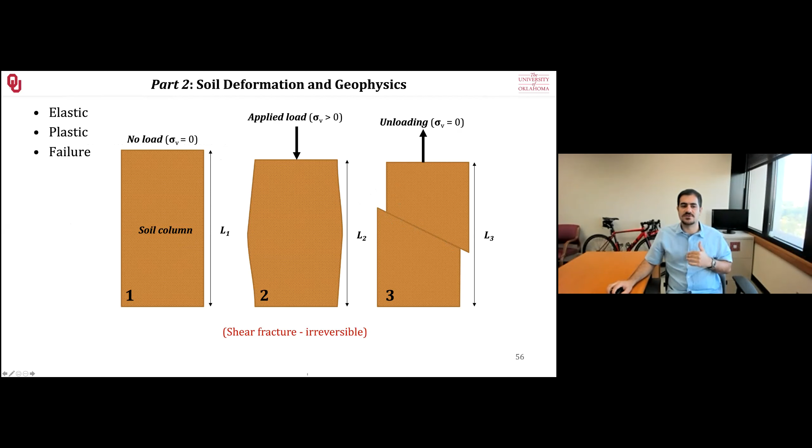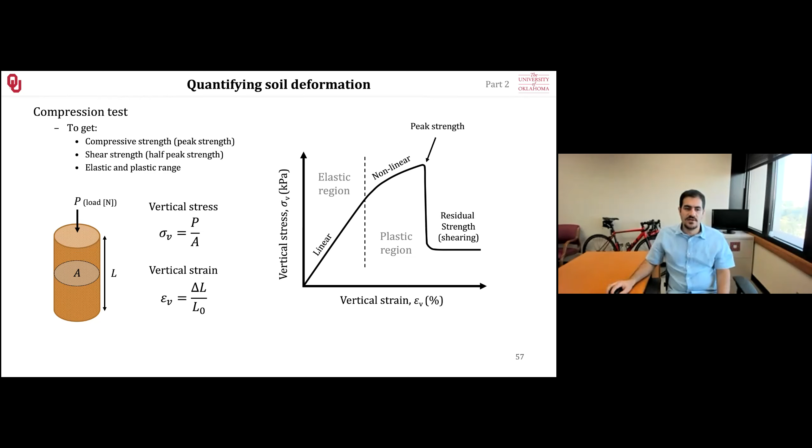We do that in the lab with an instrument called a triaxial instrument. Usually we have a load frame that applies a very small stress on the sample over time and basically pushes it so it compresses it. We measure the changes in the length with a strain transducer. We measure the amount of stress with a load cell. And if we want to do a triaxial measurement, we need confining stress as well. We can fill up the sample holder with water and measure that as well. Well, here, we didn't use that.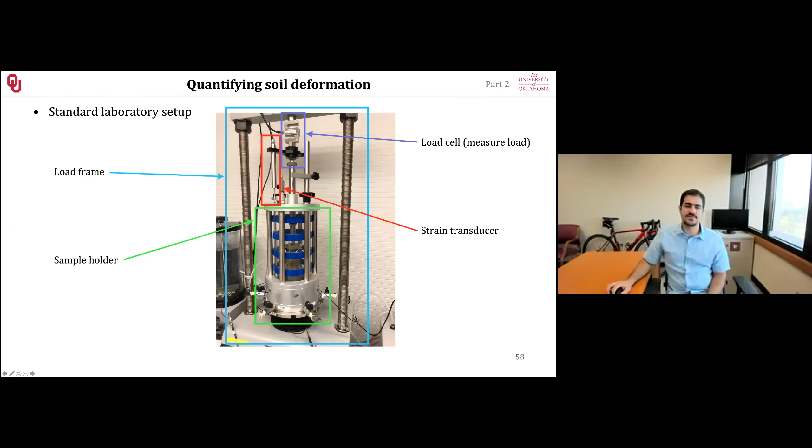Just a recap on complex conductivity. You measure the polarization and also the surface conduction and the electrolytic conduction through the pore-filling fluid. So here, again, if you have pore spaces getting smaller because of the compression, for instance, the ions can travel in a shorter time, so you would have a different signal than at the initial time. So it's important to use complex conductivity.

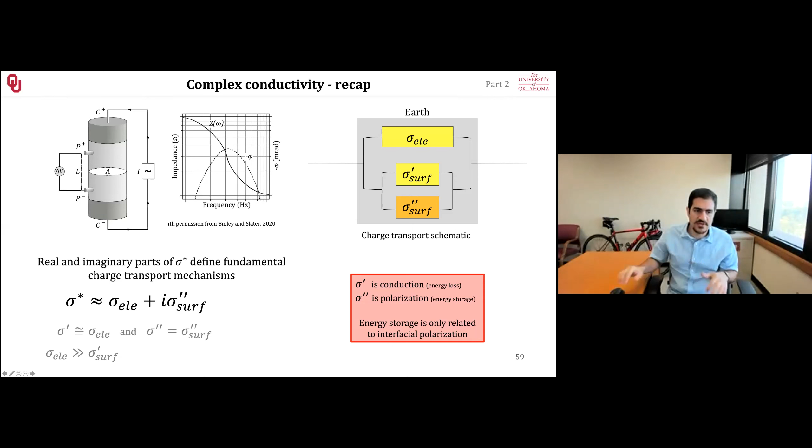Now, the thing is, to have electrodes on your samples, you need to create a customized sample holder. Most civil engineers don't have electrodes on their sample holder, so it's a uniform column of soil. What we had to do is make that uniform sample holder capable of holding electrodes. So we 3D printed this material and created this elastic, flexible sample holder. The designs and everything are available publicly. You can look at the publications that I have at the end, so you can do that on your own if you want.

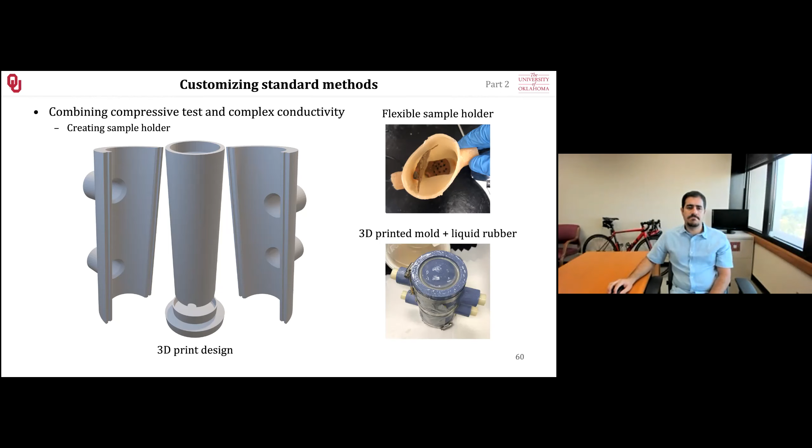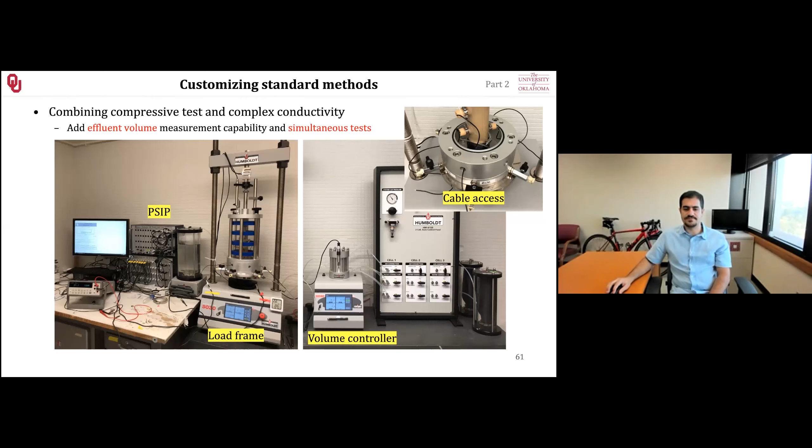It allowed us to combine a compressive strength test with complex conductivity. So at the same time, we were measuring the SIP signal, the complex conductivity, and the compressive response simultaneously, and were able to correlate these two together. Our finished sample holder looks something like this. In the civil engineering version, we don't have these electrode holders, and it's just a uniform column.

We had a soil sample that had 98% 250 to 300 micrometer silica sand. We added 2% kaolinite powder as well, because we needed a stiffer column that could actually hold together, because if you only have sand, it would just collapse when you partially saturate it. We partially saturated it below its liquid limit, so we knew this column would stand on its own, as you can see in this image.

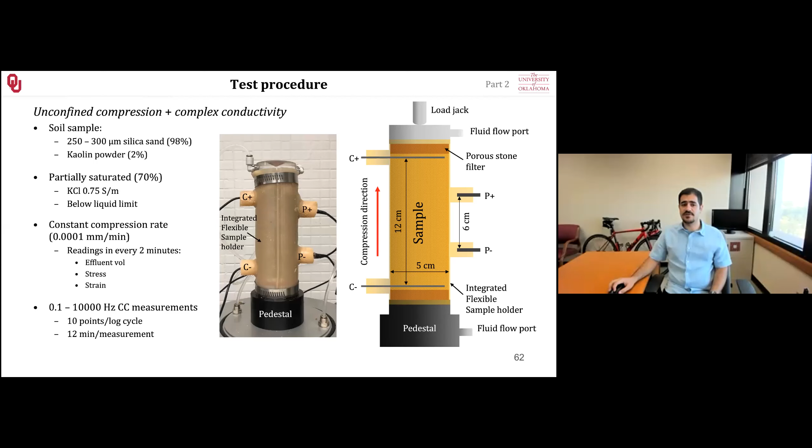And then we compressed the sample very slowly at 0.0001 millimeter per minute. We measured the effluent volume from these ports, the stress, the strain, and at the same time we did the complex conductivity measurements. We were able to show at both high and low frequencies that the surface imaginary conductivity is very sensitive to the increase in the stress as well as the failure.

To show that on our phase signal, which is good for field measurements, we can clearly see that as well. Initially, we have a peak below 1 hertz, it increases in magnitude, and then at the failure point, it immediately decreases. And also, we are clearly seeing a trend from lower frequency to higher frequency. That means that our pores are getting smaller, so the time constant is shifting.

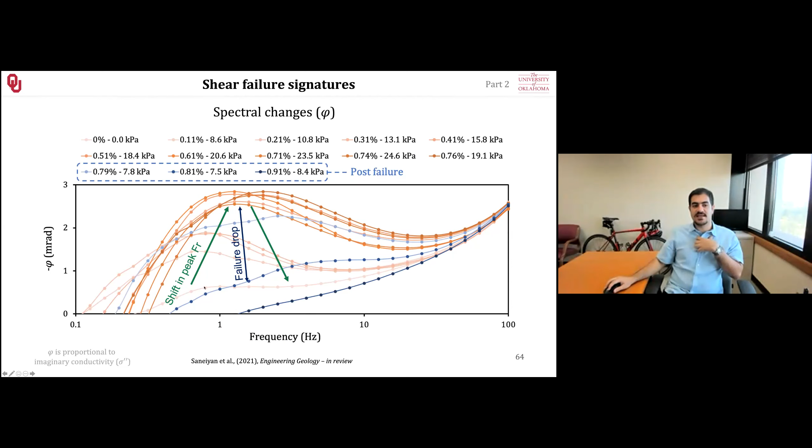If we plot the relaxation time constant, basically the time it takes the ions to diffuse back when they are polarized, we can see that it is reducing over time. It shows that we have compressed the sample and reduced the pore sizes. Initially, they were some microns, and now they are much smaller because of the compression.

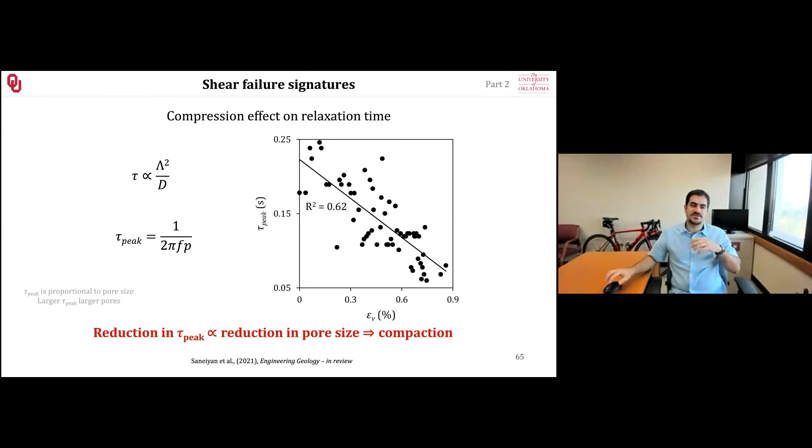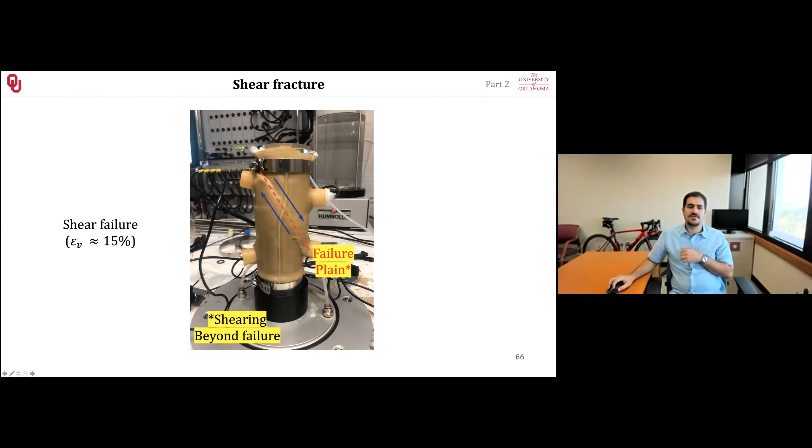So our imaginary conductivity and phase shift, and basically the complex conductivity, was capable of showing the soil failure. The soil failure clearly occurred in our samples. I pushed this far beyond its failure point. You can clearly see the fracture inside the column. Our initial failure occurred at a much smaller value than this one that you can see in here. But just to visualize it, you can clearly see the same kind of fracture I showed you initially, schematically.

So you can have this complex conductivity method in the field, and any changes that are occurring, you can see it in the signal. You don't have to go there and take an actual sample, do a stress analysis, and so on and so forth. All you have to do is basically put a few electrodes on the surface, and anything that occurs, you can basically see it. It is very good to be used in future if you want to predict soil failure, right?

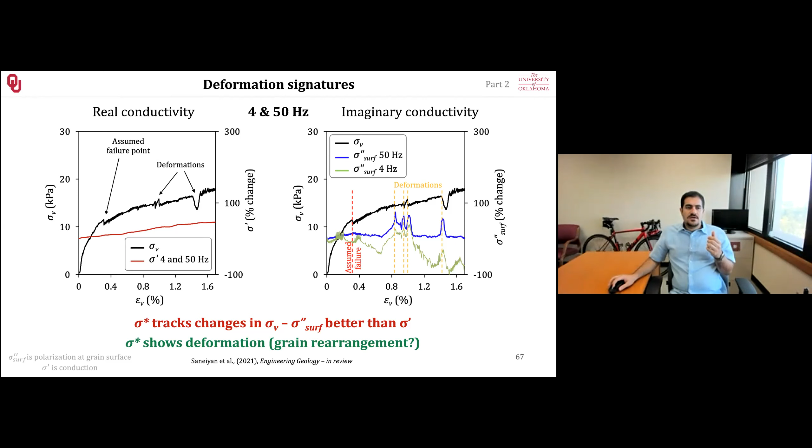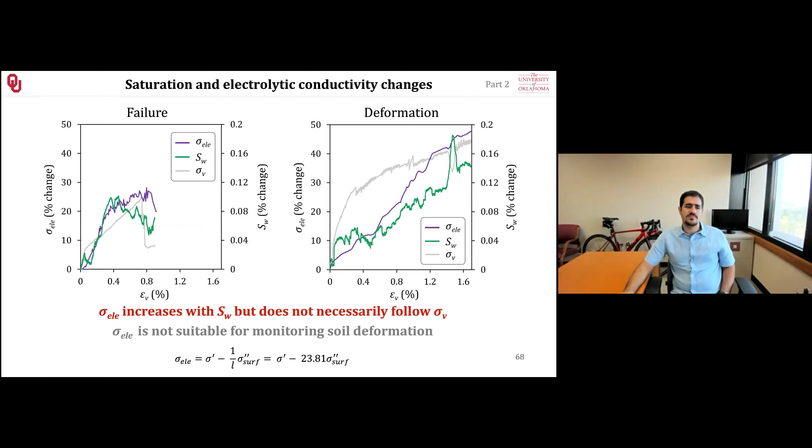The saturation and the electrolytic conductivity changes were unable to show any changes, unlike the imaginary conductivity, as expected, or as we talked about. So basically, with complex conductivity we are able to show the soil failure. Now, if we use that signal, we see kind of a flattening in here. This is a good indicator for future studies. If we reach this flat point in our signal, we could say, okay, soil failure is near, be careful.

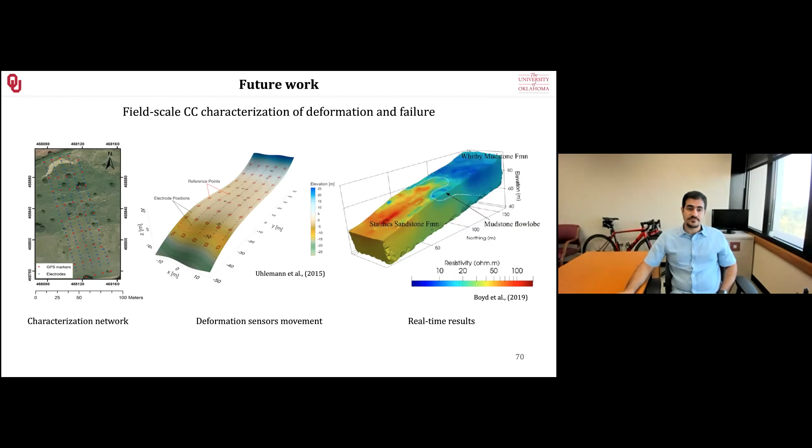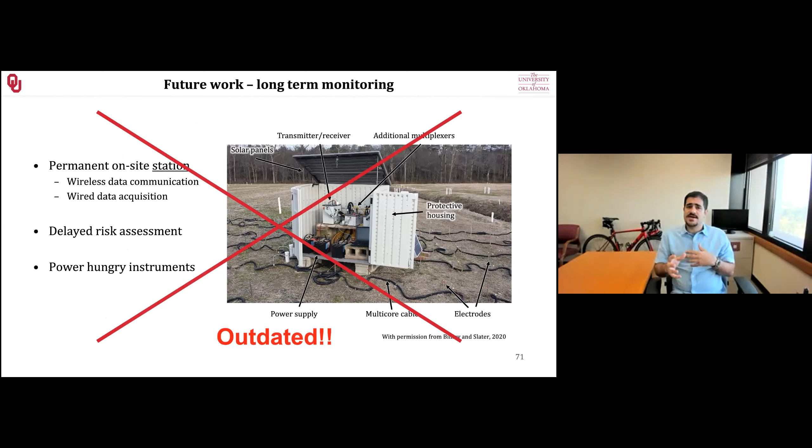And that's basically what I have in mind for our future studies; if anyone wants to join my group at the University of Oklahoma, it's the next step. We are trying to show that deformation is measurable with electrical methods. And old methods are not good anymore because there are a lot of wires and so on. So we can procure new instruments that don't have any more cables and so on and so forth. And each of the instruments uses a Raspberry Pi and does the analysis on the go.

And with the capability of using, for instance, a 5G network, which is a hot topic these days, we can do all the analysis on the go with machine learning and so on and predict soil failure, basically when the signal gets to that flat point. What we can do is simply at this point say, okay, that environment is no longer safe to live on or do any construction. So all in all, we will be able to use this to predict any kind of disaster that may be happening.